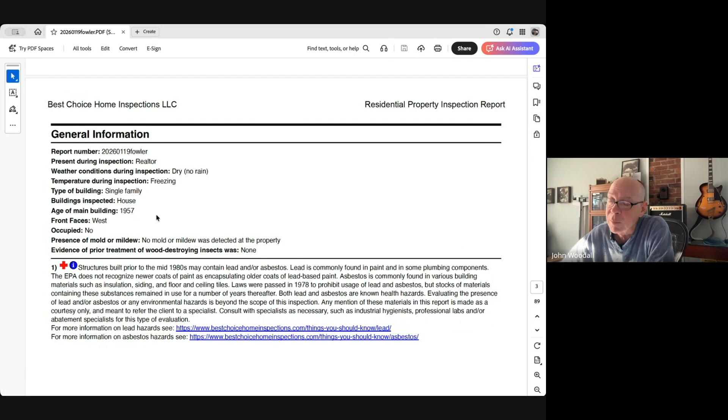When I say modern, I'm thinking 1990s and beyond, where we don't have to worry about knob and tube, and we also don't have to worry about toxins like asbestos or lead. They're typically not going to be present after 1978, with lead and asbestos being concerns before that.

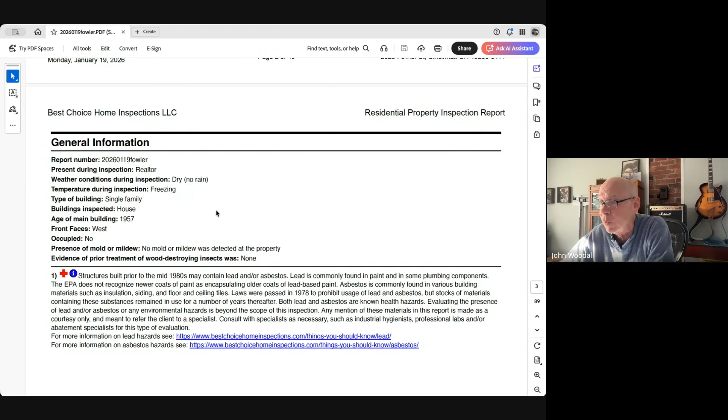Weather conditions are important. Let's say you're doing a stone foundation and there's a little water in the basement - you're not going to be overly concerned, that would be kind of normal. But if it's been July and dry for three weeks and there's water in the basement, then we've got to talk about that and note it. So that's kind of just general information.

As we go down, most home inspectors, I always start outside. You want to do that because you want to look at the way the house sits on the land. Is it in a bowl where all the water is running down toward the house? Ideally not. You want to note the way water moves around that house. It's really important - water is the enemy.

So here you'll see the site profile, and sometimes if there's sidewalk or driveway conditions - like I'm sure you've all seen driveways that go down into the house - these are things we want to look at and note: how is that water being managed once it gets down to the bottom of the driveway?

Things like that, and as we go on, exterior foundation. So as you're walking around the house, you're noting the exterior - what is it? Is it vinyl siding, aluminum, stone, brick, things like this. And they all have their own unique concerns that we would address in this segment.

Also, what's the house? How is the house built? Wood frame is a lot of houses, but some are masonry, and things like this are notable more for structural concerns, which we'll get into a little bit later. Stone foundations, masonry foundations are very unforgiving of movement. So that's good and bad.

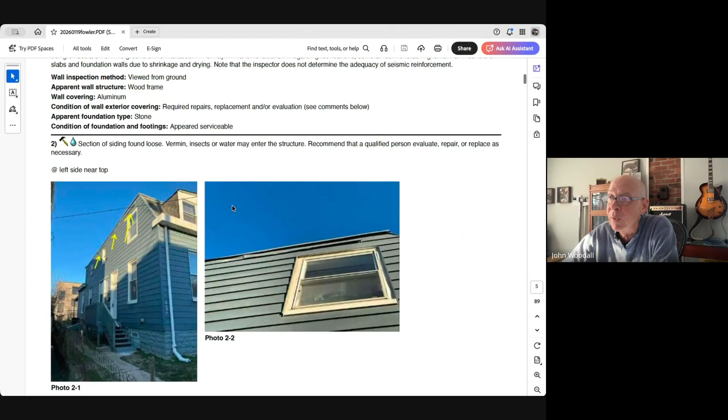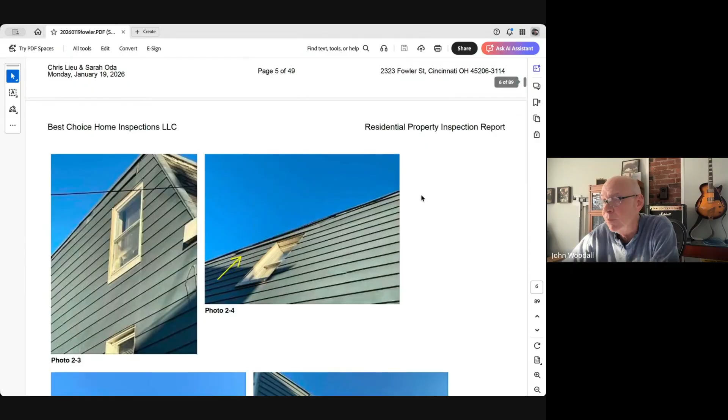You'll see on this one we had some loose siding, and we're pointing out the three aspects of why that's important and what we recommend to deal with it, as we will all concerns. This house, as I'm recalling, had a lot of siding issues, and you can see those there.

Paint and stain is relevant because if your paint, especially on a wood surface, starts to disintegrate, then the next thing to go is the wood and the structure itself. So we kind of move through that.

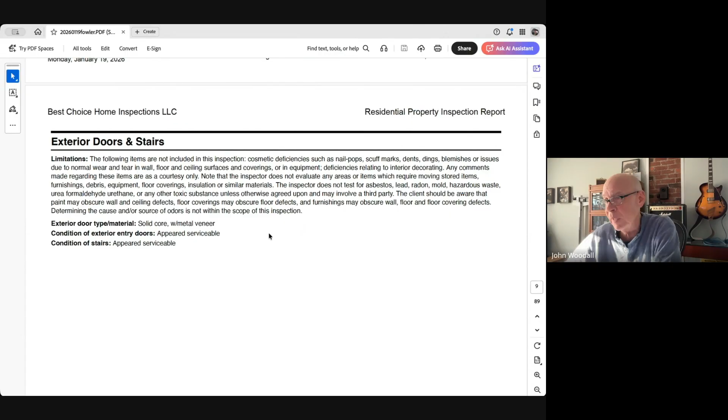When we get to the exterior doors and stairs, I guess it's self-evident, but we want to note - if it's a solid core wood door, let's note the stain and paint finish, because that's going to be subject to fungal rot and things like that. Most modern houses have the solid core metal veneer doors that I'm sure you've all seen, and then we just note their condition.

Moving on, decks, porches, patios - very concerning for decks if they're not built right. You'd be surprised how many people will throw up a deck on a weekend with their buddies, and well, they're often not framed right, or foundations aren't right, the piers aren't right. And obviously you've probably seen those decks too - they sink after about three years, and you've got those problems to deal with.

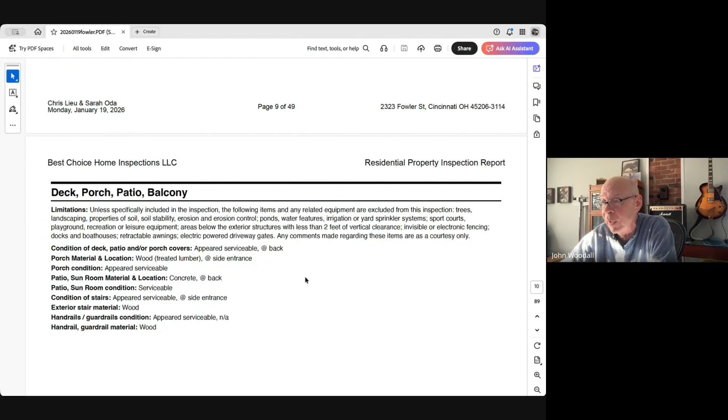We'll note maintenance issues. Any of you who've owned a deck, every 3 or 4 years you've got to maintain the wood decks, treat them, seal them, etc. In the reports, I'll note what the deck's made of, and I love the Trex or the PVC decking - that is a great product. I have it myself, relatively maintenance free.

And if a deck is in a real bad way, I encourage my clients to go in that direction if they can. But noting the structure, handrails, things like this - these can fall into the hazard category, and that's obviously something we want to note.

And my understanding is, and again I'll defer to the agent, but if it is a hazard - let me ask you, if it is a hazard, is it usually incumbent upon the seller, or is that just sort of a gray area?

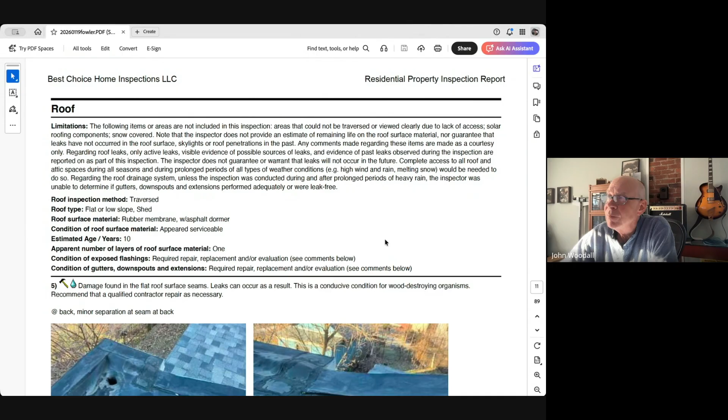I think it depends on the totality of the contract. If you're paying asking price or very close to it, then yes, it's all negotiable. That's why I defer to the agent.

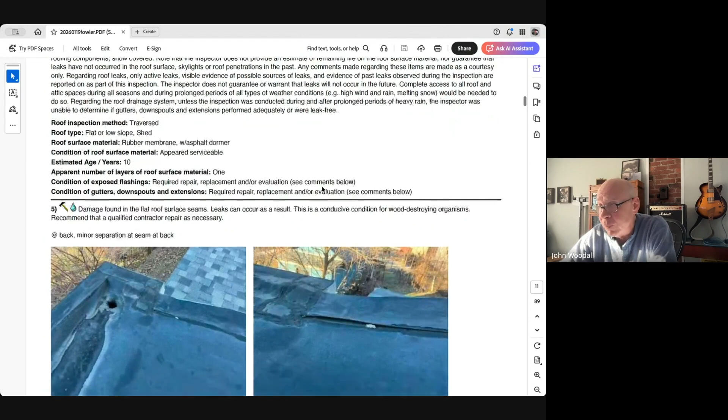Roofs are very important, not just because of the potential for water damage which can lead to mold, mildew, fungal rot, but they're very expensive. You want your home inspector to take a really good look, either climbing up there, flying a drone, or a mixture of both. I climb out windows, I climb on roofs. I do have a drone, but it's not my first choice. I prefer to walk that deck - there are things you can feel under your feet that you can't get with a drone.

This property we're using as an example looks like it had a rubber roof. We see in this image 5.2 that the seams were starting to go. I don't recall, but when we get further down there'll be interior shots - if we had interior moisture, that'll be noted there. Right now we're still focused on the exterior and the roof.

There were a couple notes here, but we want to note specifically the condition of it. An experienced home inspector has seen enough roofs to know about how old it is, and they should be able to offer that estimate for you. It's important because the average lifespan of an asphalt roof, which is typical, is about 25 to 30 years. If the home inspector says this roof is about 40 years old, that's the next major expense you're going to have at that property.

You need to know that an average roof these days is $15,000 to $20,000, and that's for a 2,000 square foot home. You start getting into larger, more custom homes, then they can get very expensive. And again, that's asphalt - we're not talking about slate, tile, metal roofs, things like that.

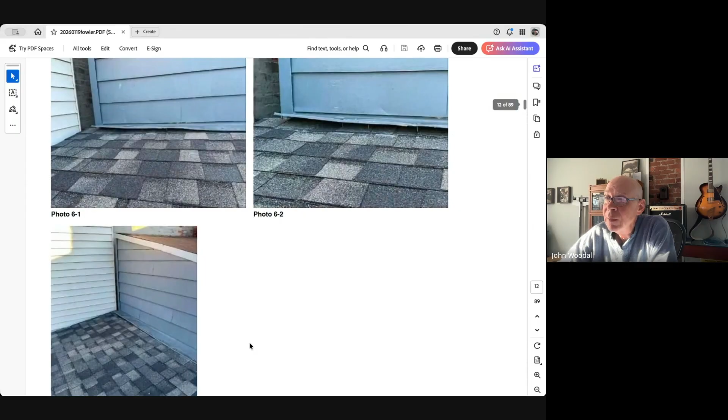Let's go on down here. This house was a hybrid - it had a couple of different roofs on it. Let's see what the issue was with this one... oh my God, this is... we had downspout issues with this one as well.

This goes back to walking around the exterior, and again, water being the enemy of all structures. We want to note how that water is moving around the property and if it's moving around effectively, because that all has to be managed and maintained.

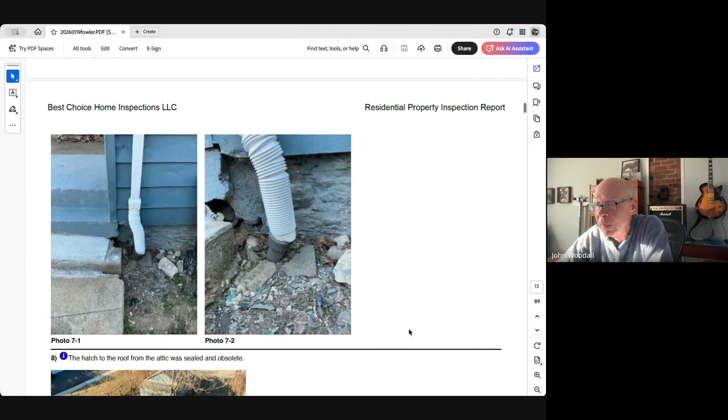This was interesting - I got up on this roof and they had a hatch up there that they'd set this old chimney pot on. These chimney pots are beautiful, you see them on old homes, but if they're not being used appropriately, then maybe we do away with them and move to a more modern chimney.

Did they just put it up there to hold the hatch down? Yeah, in this case that's what they did. I think they had it up there and were looking for a weight so the hatch wouldn't blow away. Whoa, but it could roll up, right?

Yeah. Now here's another spot on the same roof - we had other chimney crowns that were intact, but we see this crown and we know that ice and water can get in here, get down this masonry chimney. Masonry chimneys do not tolerate water very well. We've learned a lot over the last 100 years about how carbon dioxide can mix with water and create carbonic acid, and just eats these things from the inside out.

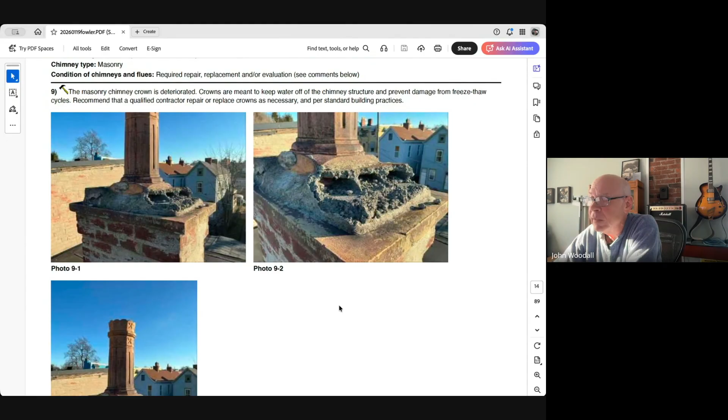So rain caps have become the modern standard, and I always encourage them when I don't see them. Now any architect would probably say it's a crime to put a rain cap on this beautiful 100-year-old chimney pot, but that's a different conversation. Let's move on.

These fireplaces were taken out of service. The home inspector wants to note that, because obviously it's an egress for creatures, and it's also a thermal barrier - if they're open, you can lose a lot of energy out your fireplace. So if they are taken out of service, it's nice to see that they're sealed.

Going back to the chimneys, if they're not in service, I recommend we seal those as well. Typically, like this home, the chimney was being used partially by a water heater and a furnace, and then some of the chimneys with the old fireplaces were shut down. But that's all something that should be noted by your home inspector, just part of a general home inspection.

Basements obviously are critical for many reasons. Structural issues, we'll find those problems here. Water penetration, see that here. Often if there's mold and mildew, it will be found here. And usually termites are found here as well, or at least the origin point of the termite. So that's all very critical.

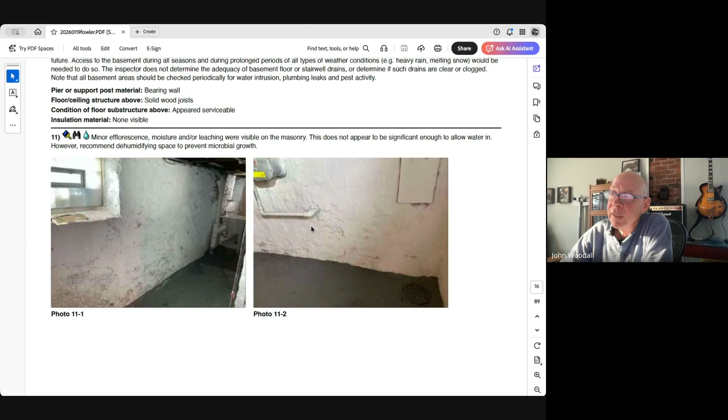This house looks like efflorescence, sort of like where this was an old stone foundation and a little bit of water. Masonry is like a sponge. You can put water on one side, it'll soak through to the other side, and that's what we're seeing here. This condition can usually be taken care of with a dehumidifier and some good paint sealant. This basement wasn't too bad, as I recall.

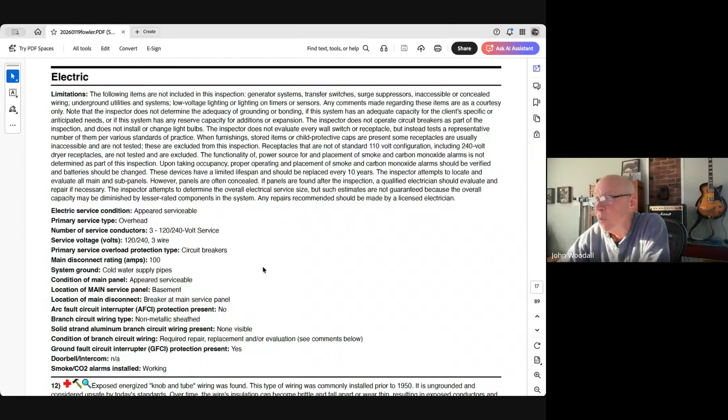I don't want to skip over electrical here. It looks like there weren't a lot of electrical problems. Electrically, though, the home inspector should be noting the type of service, were the wires underground or overground, what's the main amperage for the home? That's relevant because what if the buyer wants to add a hot tub or another addition. If they're going to need more juice, they need to know what's there now and what they can look at. They're probably going to need a new electric panel and things like this.

Now, it looks like we did have some exposed knob and tube in this property, and that's noted here in item 12. And then there we see the knob and tube in the images. That's an electric tester here where my mouse is, indicating that it's hot, so it was in service. Insurance companies don't like knob and tube.

Can you say what knob and tube is?

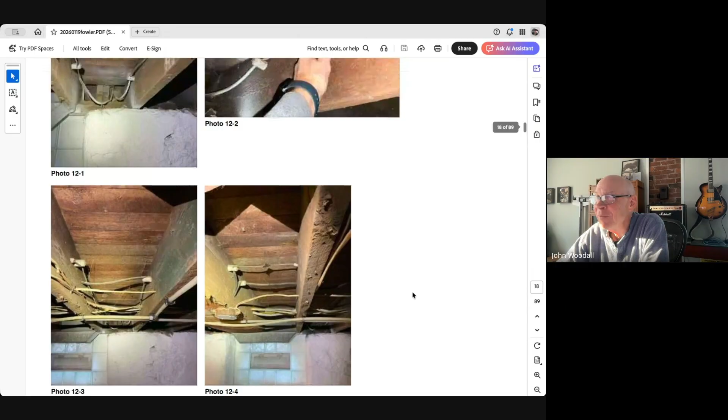That can affect the loan because let's say if it's a HUD or an FHA loan or a VA loan, they really, really care about that. So that usually has to be taken care of ASAP. I could go on and on about knob and tube, but we'll leave it at that for now.

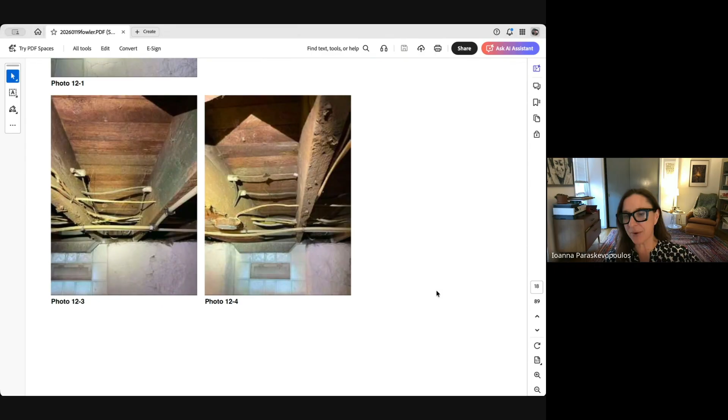Could you just briefly say why knob and tube is not something you want in your house? Yeah, well, it's ungrounded. So you can have an old house that has some knob and tube, but where the wet areas are, the kitchens and the baths, we've got to have grounds. You want to see those GFCI plugs, the little push button plugs that I'm sure you've all seen. We want to see those there in the wet areas. The rule of thumb is generally arm's reach, so if you can touch the plug in the water at the same time, it ought to be a GFCI.

You could also do arc fault circuit interrupters, which are on the electric panel itself, but that's more the future. Codes are moving that way, but let's stick to just having protection on grounded plugs and circuitry near a wet area. That also applies to the exterior. If we have a plug outside, we want to make sure it's grounded, has GFCI protection, and a weather guard too. We don't want it to get wet. But that's why it's so important.

Going back to insurance companies for a minute, they're okay with it being out of sight, out of mind. In other words, if it's in the wall running up to your dining room to a two-prong plug where you're only going to plug in a fan or a light, it really is not a significant problem. But we don't want it here, as seen in these images, where you could poke it with a stick. You could see it, you could touch it. So we really want this area to be boxed up and replaced with Romex, even if it's ungrounded, and then take that up the wall.

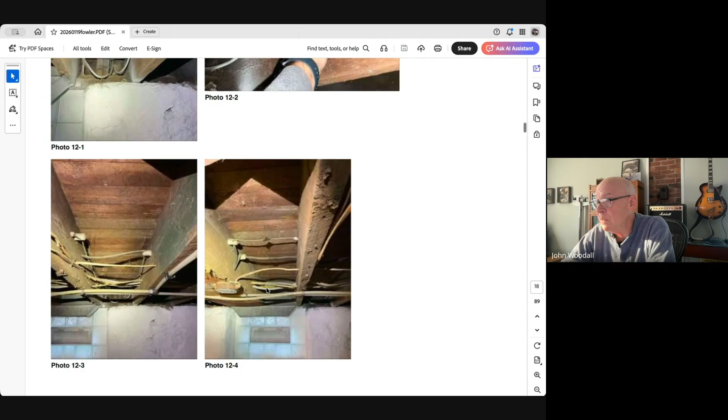What I'm getting at is, on an old home, there's no obligation to bring it up to modern codes, but there is an obligation to make it safe. So that's the distinction.

Any other questions about knob and tube or electric in general? We might touch on some more here as we go.

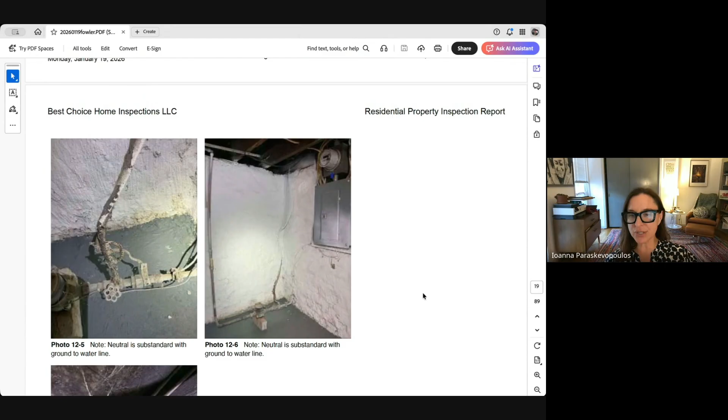Maybe this isn't a fair question to ask you, but do you know about, on average, how much it can cost to replace knob and tube? Well, it's a variable. Obviously, it depends on how extensive it is. But I've had a few homes done myself.

I flipped a lot of homes prior to starting this business. Let's look at these images. Let's just say it's isolated to these areas.

What the electrician would do, and I would recommend a licensed electrician doing this, is likely replace what knob and tube we can see here with new Romex, new wire. Then they would take that over to the edge of the foundation or the wall and put a junction box there and tie the new wire to the old wire. Now, yes, it's ungrounded going up that wall, and that will hopefully lead to ungrounded plugs that we don't care about. Again, the dining room, the living room, two-prong plugs.

We want to replace that wire with grounded plugs that need to be grounded at the kitchens, baths, and wet areas. But back to your question, if you're not replacing a whole bunch of Romex and doing a whole bunch of junction boxes, you could probably solve this problem for $1,500. But if the whole basement has to be pulled, obviously the costs escalate.

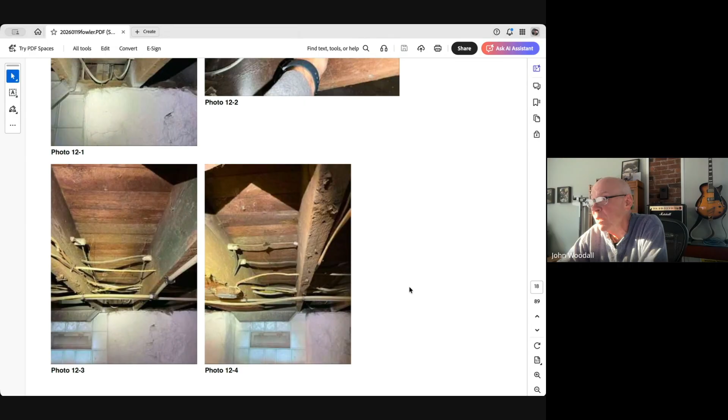But if there were a drywall ceiling here or a sealed ceiling, then it would be less important. Again, it would be like the wall where you can't see it or poke it with a stick. So out of sight, out of mind, as long as we have the grounds where we need them.

Let's see, it looks like, what was the deal here? Oh, I think the ground wire came loose on this substandard ground wire to the water line.

So what happened here was the ground wire, they had run a ground wire separately. Sometimes not licensed electricians will do this where it's a cheat kind of thing, where they'll run a ground wire to connect to the plumbing and then run that wire to a plug by the bathroom so they can get a grounded plug there, rather than running brand new grounded wire or Romex.

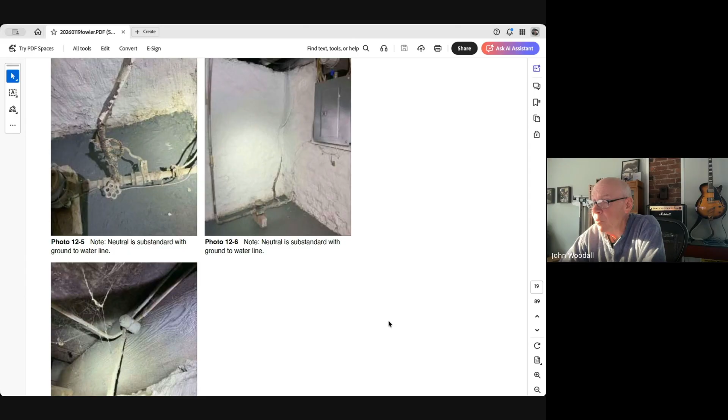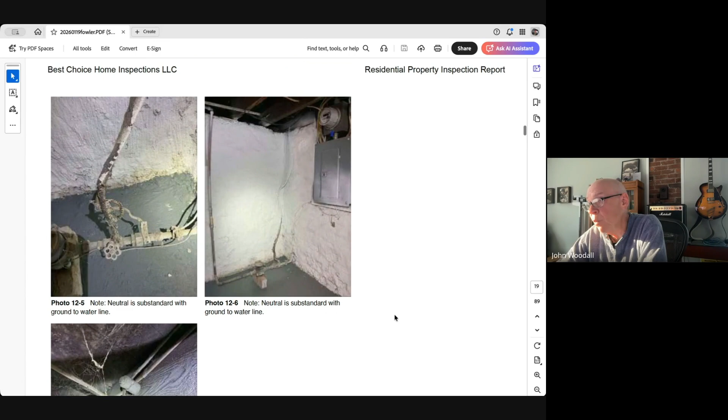Now, that's a separate issue from having your electric panel grounded to the plumbing. That should always be the case, regardless of how old the house is. That panel should have been upgraded and grounded to the plumbing. In modern homes, you want a ground rod outside as well. You want two grounds. In older homes, you'll often see one and not the other, but I always recommend that you have two grounds. Did I divert there, or did that answer your question?

Yes, it did. Yeah. Okay. Good.

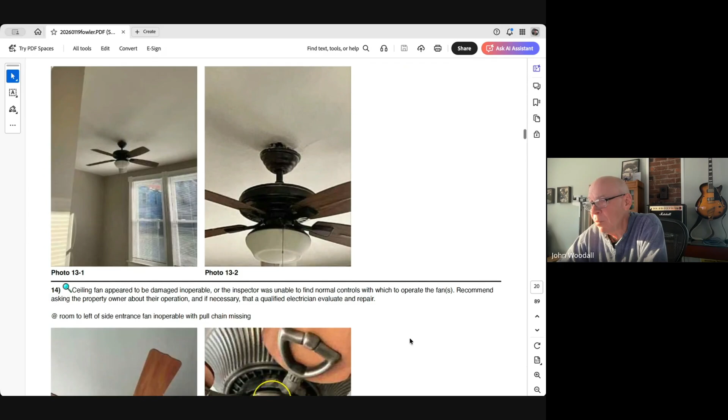So yeah, then I go on. It looks like I'm talking about the light fans, and this is important because what if that fan falls? We're not necessarily running new wire, but we're stabilizing that fan and making it safe. So that would classify as a hazard if it's not properly secured.

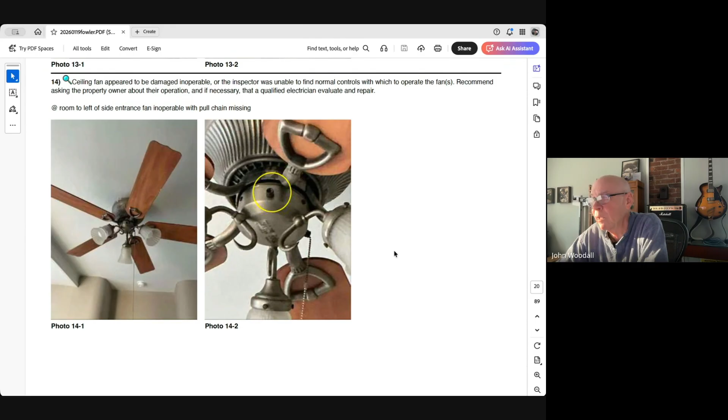And then we're going to point out the defect with the fan. In other words, the pull chain was gone. You can't turn the thing off and on. Simple but important.

We're in plumbing now. Here we want to note where everything is, because you'd be surprised how many homeowners don't know where their water main is. And if a line breaks up in your upstairs bathroom, you've got to turn that off quick, so you don't want to be searching for your main. So the home inspector should always point that out. If the client's there, point it out with them, and always put it in the report.

And again, in doing a home inspection, I like to have my clients present because there is so much to be learned from the experience, just walking around with a home inspector and seeing where things are and what to do about this and what to do about that. I think it's critical information.

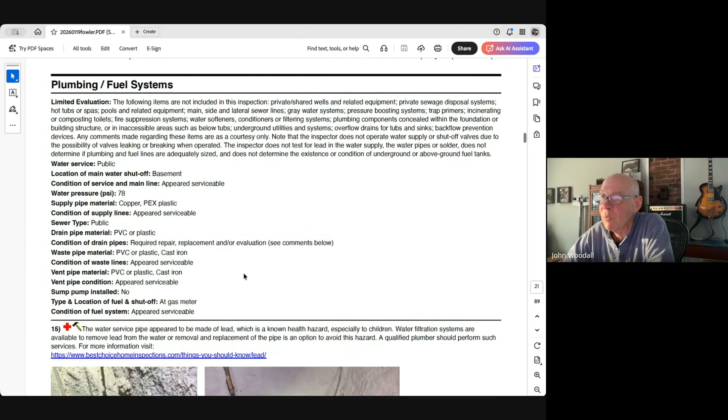Now, I'm always amazed to hear from either clients or real estate agents that there are home inspectors out there that don't like anyone around. They like to work alone, and I don't subscribe to that. Yeah, I'll leave it at that. But there's a lot of value in being there. And I encourage, no matter who you hire to do your home inspection, I encourage you to be there.

So as you can see here, I made a note that it's public water, we're not dealing with a well — that's a whole nother thing. And then we've got our main shutoff in the basement. Don't cover it with boxes. Everything appeared serviceable. I note the type of plumbing.

Here we had copper and PEX, so we had a hybrid system. PEX, for those who don't know, is that more modern product — it's basically like a PVC type product, a polyethylene something, but it's nice, it's modern. The nice thing about PEX is if you freeze copper, it can rupture, and PEX won't do that. It has a little bit of elasticity to it. It's also great in earthquakes, but that's not too much of a concern here. But it can handle freezing, and we like that.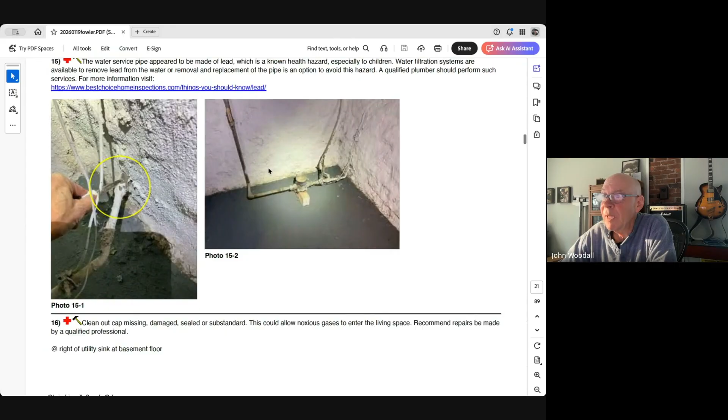General conditions, yeah. So we made those notes. Now here we had lead. So this was an older home, and that's something you want to note.

Now, in the city of Cincinnati, or I believe the state of Ohio, and maybe across the nation, the water companies are going around and replacing the lead at their expense. And I hope it stays that way. But I encourage my clients to make that call first, find out if you're on the schedule. If not, get on the schedule.

But know that you currently have lead pipe coming in from the street. And you can see where it comes in at the basement foundation here, and then it taps into the water meter here, and then we're copper from there on until it meets the PEX. So this is the concern, the lead underground and at the meter and then to the street. And that's what the water company will be replacing systematically.

Hopefully we'll stop seeing this in the next few years. But I encourage my clients just to know it's there, but also there are some really good high-tech water filters available that can filter out heavy metals and just about anything these days. So that's the short-term fix until you can get this lead replaced.

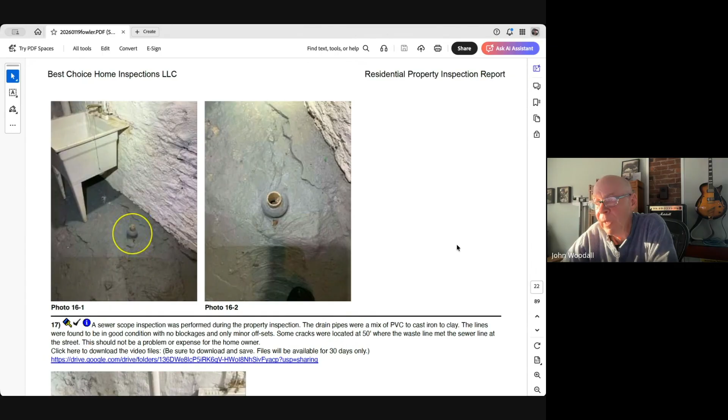Then other issues we're looking for, we don't want to see open pipes in your basement floor. It could be, especially in older homes where they would mix groundwater with sewage water. But that means that creatures that get into sewer, we're talking about rats here, they come up and they will, if they have an egress, they'll find it.

Everyone who lives in Clifton knows that if you don't have a drain cap, you will have rats in your basement. And toilets too, right? Well, yeah, they swim, don't they? They do come up those toilets in the basement. That's aggressive. Yeah. So I always note that.

I think most home inspectors do. We did a sewer scope at this inspection, and when we get through this, I want to show you a little segment on that. We'll do a little video thing, and you can kind of see what we saw here. There were some issues that were found.

These can be very expensive problems. Basically, you're busting up the concrete, digging up the pipe. Sometimes that can extend under the foundation. Sometimes that can extend all the way to the street, and that can get expensive.

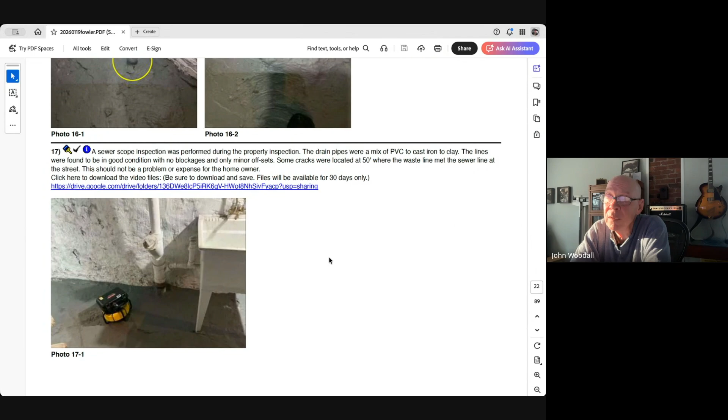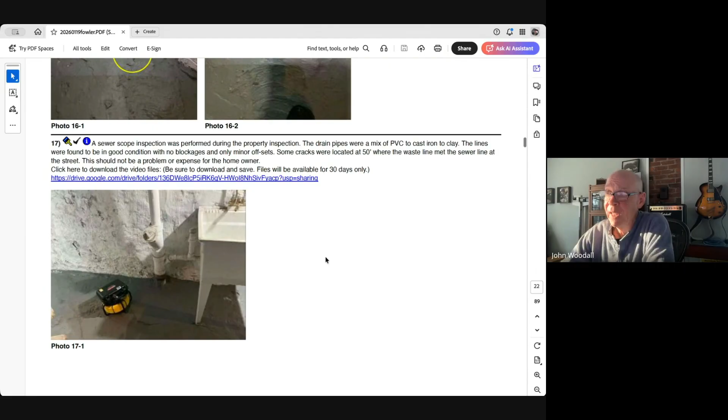I paid for one about 15 years ago, and it was $9,000 back then. So that was for about a 15-foot one. Wow, so you can only imagine what it is now. I haven't paid for one in a long time, but they get into the thousands very quickly. So you need to know about this before you buy the house.

Let me just say this about that. A sewer scope is probably always a good idea, but I think if your home is older than, say, 1980, I would almost insist on it, because you're getting into the older pipe, cast iron, clay, and that's where the real problems can arise. Now, I have seen in new construction where a concrete truck backed over brand new PVC pipe.

We ran a sewer scope and we saw a collapse, but that's an isolated incident. But if you have any suspicion that there's a problem with the drain line, I always run the line. Like, see that utility sink there? I would run that for 5-7 minutes, full blast, and just listen for gurgling, make sure we got good flow. Any home inspector should be doing that regardless of the sewer scope. And you kind of get a hint of the condition of the pipes.

But anything prior to 1980, I would get a sewer scope. These are really expensive problems that you want to get in front of or know about before you buy the home.

Now, all the mechanics, water heater, the furnace, which we're going to get to, we want to know, how old is it? Who's the manufacturer? Some manufacturers are better than others. Is it gas? Is it electric? Things like that. So you got a 40-gallon gas tank here, that could accommodate a family of 4 probably with no problems. But 6 people, you might want to bump that up a little.

Also, water heaters are expensive, so we want to know we have no issues with it, or how old is it? Are we going to be replacing that in the next few years? Do you check and see if it's a gas water heater? Do you check and make sure it's not leaking carbon monoxide?

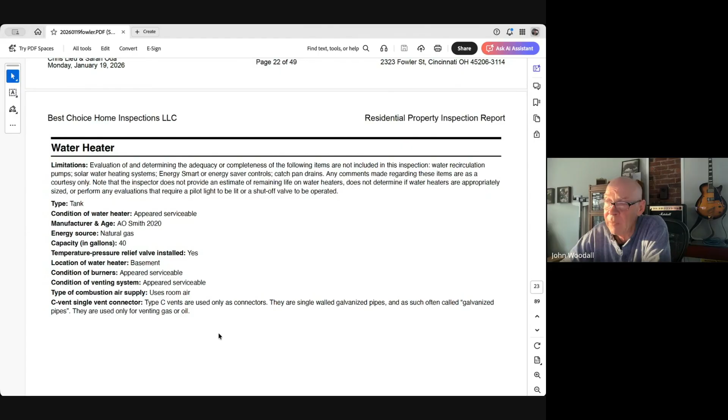Yeah, that's a good point. Thank you, Randy. I carry what I call a sniffer, basically a CO and gas detector. When I'm running these things, first you always trust your nose, that'll give you a clue. But I'll sniff the areas where carbon monoxide's escaping or running up the flue on the furnace and water heater, and make sure there's no leaks. I'll often check connections around the oven or gas appliances too, where that little hose goes into the back of the oven. Sometimes you've walked into a kitchen and gotten a hint of gas, and that's usually where it's coming from.

Same thing with the HVAC system, both the air conditioner and furnace. This is a Trane, love Trane, top of the line, 2020. I'd tell this client, we'll check it out, but you're not going to have any problems for 20 years. These are great systems, just keep them properly maintained. It looks like the furnace was a 2020 Trane, and the air conditioner was 2019, so they were probably put in at the same time in 2020. They're really good systems, so I think this client's not going to have anything to worry about.

Oh, what did I say here? It was actually not working. Sorry, I got ahead of myself, didn't I? Something was going on, but they fixed it, and it's been working great since. What we know about the Trane is it's a good system, relatively new at 2020. But I did notice we want to see a nice blue, clean flame, meaning it's not fluttering, it's smooth, and we're not hearing a lot of pops. So apparently we didn't have that here.

Or roll out, why is that important? Well, it's kind of like a carburetor on an old car, the flow of oxygen and gas needs to be adjusted evenly. If it's not, there's efficiency issues and maybe carbon monoxide issues. So this one probably had that problem, probably needed a little tuning.

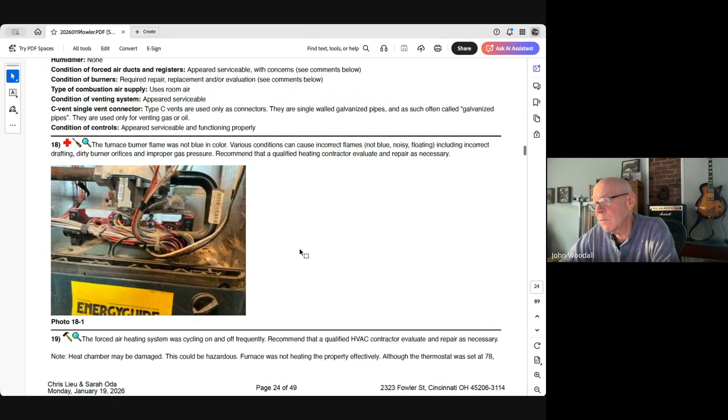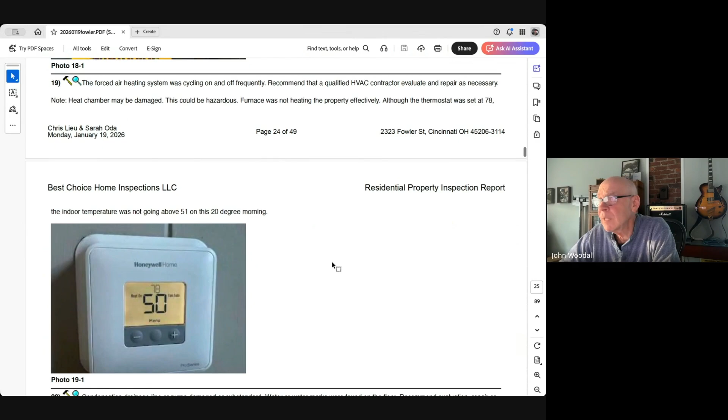We did have some issues here, it wasn't going over 50. I think that's what they did, was clean it. Yeah, and from what I remember, it worked great afterward. So I think exactly what you're saying is what they did, which goes back to the maintenance. You really have to stay on top of these things.

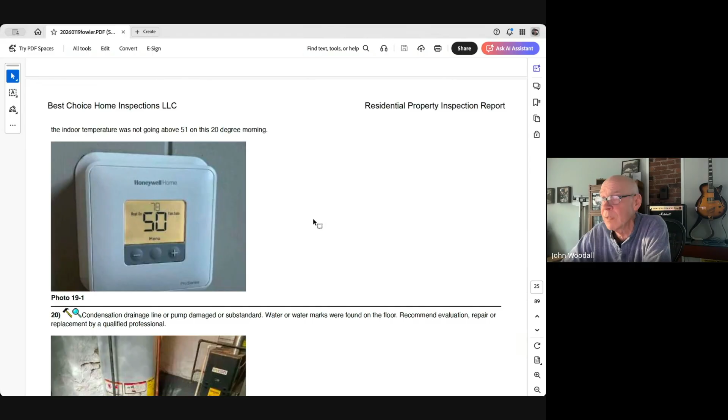I have an income property, and the tenant didn't replace the filter, and I got a call that the furnace wasn't working. We quickly figured out it was because the filter was clogged. You can break these things by not maintaining them, and they're very expensive. So let's get them serviced and do routine maintenance, changing the filter, and if you have a humidifier, change those humidifier pads.

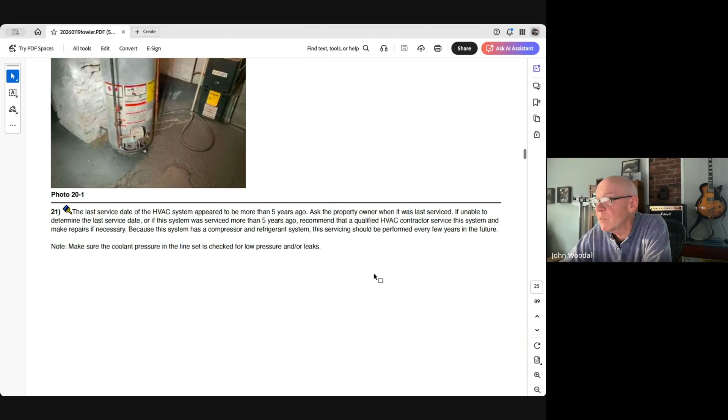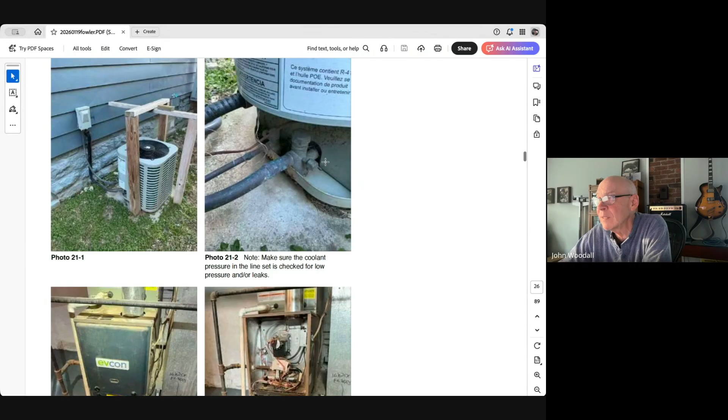Here's where I note that in the report: the last service date of the HVAC system appeared to be more than 5 years ago, so I recommend that. And here's a note to make sure the coolant pressure is checked in the line set. This is the line set here, and that's where the technician will put the pressure gauge on to make sure everything is running correctly.

Here's the HVAC system. Oh, this was a multifamily, wasn't it? Yeah, I'm remembering that now. So we had a couple different systems here. This is not the Trane. This is an older model.

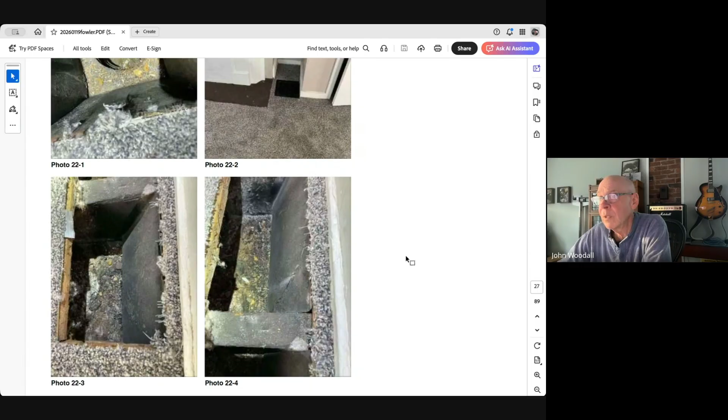And then I always look in some of the ducts, especially with rental properties. A lot of times you find really nasty things in there. And if you've got turnover, obviously, if you're buying the property, there's turnover.

You don't want to be breathing all this old stuff that's nasty in the ductwork. If I see mold or mildew, I'll point that out. That's a whole other topic, but we're going to want to have them fumigated and kill that bacteria so you're not breathing it. Usually, for most homes without mold, you can just vacuum these things out with a shop vac, and that'll be adequate.

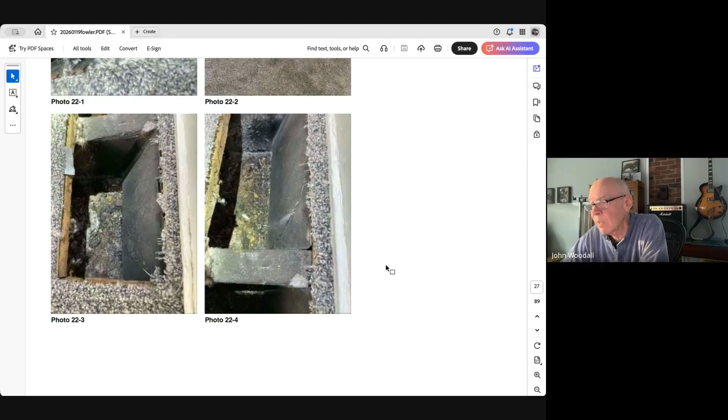There are companies that do professional cleanings where they go down the whole thing, and that's great if you want to do that. Probably a good idea for rental properties where you have a lot of turnover, or pets, a lot of dog hair and things like that in there. If you have allergies, that's a consideration. So things like that.

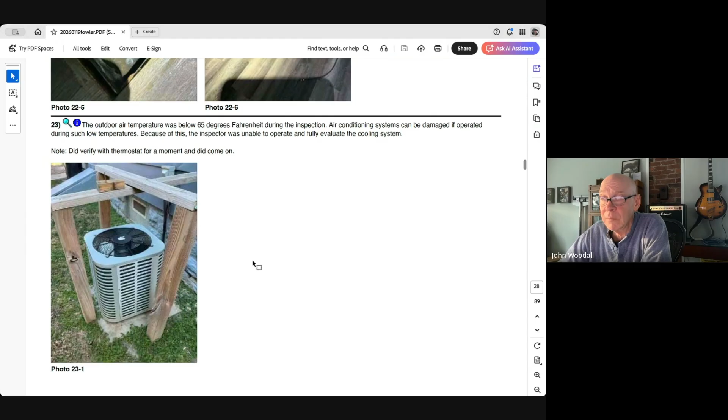This was a cold day. It was January, so you can't run the air conditioners when it's really cold. You can break them. Sometimes I'll turn them on for just a few seconds to make sure they kick on and that the thermostat, those systems, are operating. I can't fully check the system since you don't want to run them when it's cold. They can't be really checked, so I'll say, let's do that later.

Do we get to the laundry section? If there is a laundry, looks like we had one in the basement. Looks like we had no issues, but things to check there might be the gas line to the dryer, if there is one.

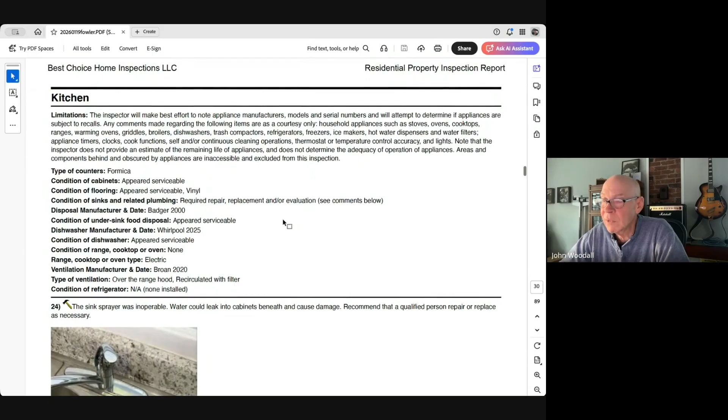I always check serial numbers on all the appliances with kitchen, laundry, and also the water heater and the furnace too. With that, I'm verifying the age, but I'm also checking for recalls. I want my client to know what they're buying. If there's been a recall, I want them to know what they've got ahead of them. Now, sure, the recall will pay for it, but it's a hassle. Believe me, I've done it. And there's usually a charge for this or that, but anyway, it's good information.

So now we move upstairs from the basement and everything down there. That's where the home inspector will spend most of their time, by the way, in the basement.

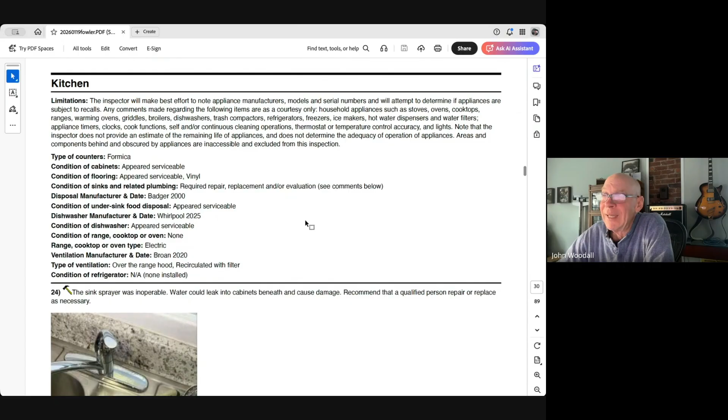The kitchen. So here again, I'll check serial numbers on everything. I'll note the manufacturer and the date of the appliances. Looks like here the sprayer wasn't working good. I think it was this flange. What can happen is water pools here and it goes down here where my mouse is at the flange for the sprayer, and it ends up underneath your sink and your cabinet. And now you've got potentially mold, mildew, fungal rot, things like that. Water is the enemy.

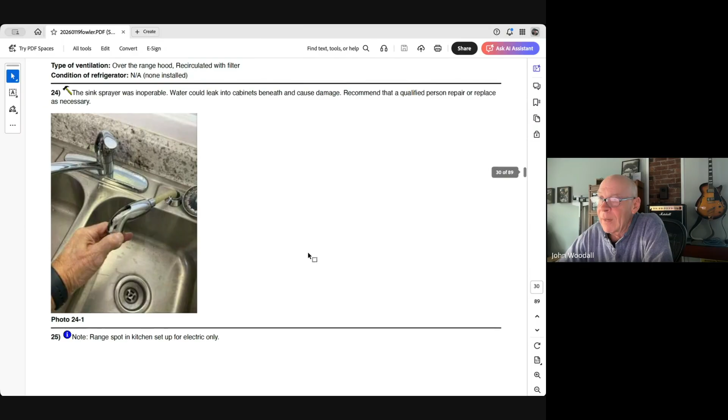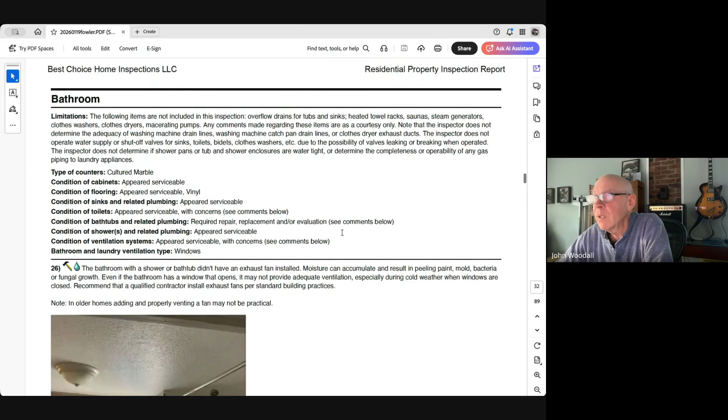Moving on. Okay, the bathrooms, each one individually. We'll note what are the products used. This one, cultured marble, is the manufactured countertops that you see off the shelf in Lowe's. They're not made out of marble. I don't know why they call them that. But if it were granite, I would note that, or tile, or there's so many products out there, Formica. So we note that in the report.

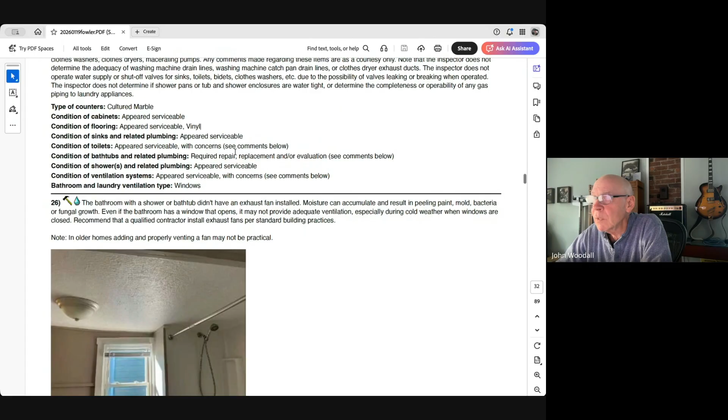If there's an issue, like here, it'll say, condition of the toilet, see comments below, and then we'll go on down and we'll look at that.

I always note, now in older homes, there's often not ventilation fans in bathrooms that create a lot of moisture, meaning a shower or a tub. Back in the old days, 100 years ago, a lot of people didn't take showers. Everybody kind of bathed, and that's just how they did it back then. Also, they would crack a window. So what you find in old homes is no ventilation fans.

Now, I always recommend them, but I put a note in here. Again, what I was saying earlier, there's no obligation to bring it up to modern codes, but I think the home inspector has an obligation to mention these things. Let's say the buyer wants to remodel the bathroom. Well, hey, that would be a great time to put in a ventilation fan at minimal cost. So you'll see that in there.

And here we've got the toilet issue. It looks like, let's see, what was the deal with that? Oh, simple, the seat was loose, no big deal. If you're buying a home, you better own a screwdriver. If not, go get one.

Now, substandard caulking, I always look at that very carefully, and most home inspectors should.

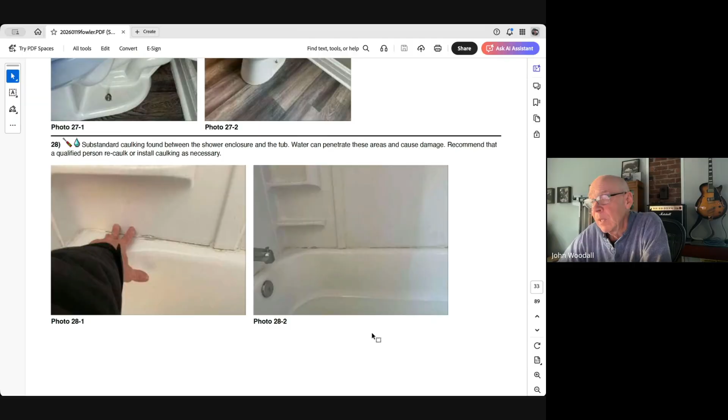If water gets behind there, we've got all those problems that we've talked about. So caulk is one of those things. It has to be maintained and noted.

Obvious things like, a home inspector should be running that bathtub and that sink because you're going to know, right? So we had a clog here or a slow drain. Again, easy problem to solve, but very important, and you really need to know that if you're buying the home.

Here we get into the interior ceilings, walls, and floors. This is where we would find maybe those water issues that were coming from the roof, the attic, or somewhere else. The windows, the siding. Let's see, looks like

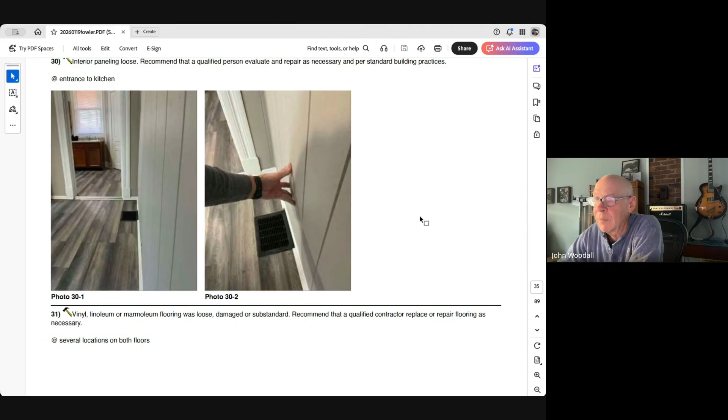we didn't have a whole lot of wet issues. Loose paneling - again, this was an old house, and with plaster and lath, it can get loose over the years. A lot of folks, rather than tear it all out and re-drywall, they'll put paneling over it, and then you get loose paneling and things like that. So again, it's not enough to read it on the report - it's here, it's noted, and you can see what's going on. But if you were there at the inspection, the inspector would be talking to you about what's under that paneling. And an experienced inspector should know without looking at it.

Made notes on the floor. We had some issues. A lot of this is cosmetic concerns, but still a notable defect, and an expense. The buyer has to make these calls - do I want to repair that or replace it? Those are conversations that you have, but that might be more a conversation that ends up being between the buyer, the realtor, and the seller, as part of the negotiation process. But it looks like we had quite a few here.

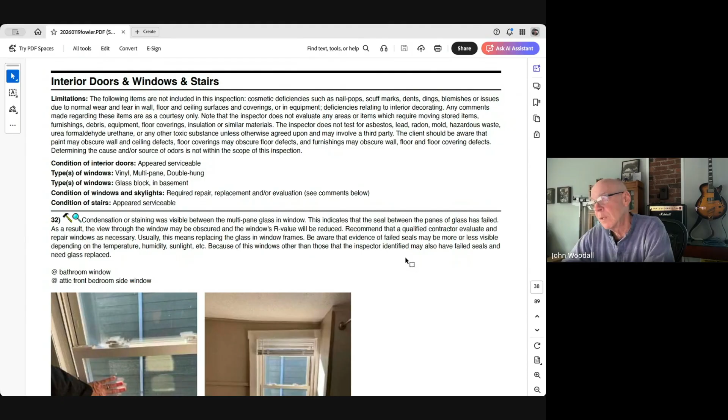Again, older homes often don't have level floors. It's not that it's structurally unsound, just that things move over the years. I tell my clients that unless there's an obvious issue with ongoing movement, typically a home that's been around more than 30 years has settled, and you're not going to see a lot more movement. So if the problems can be addressed at that point - every situation's unique, but I'm kind of making general statements here.

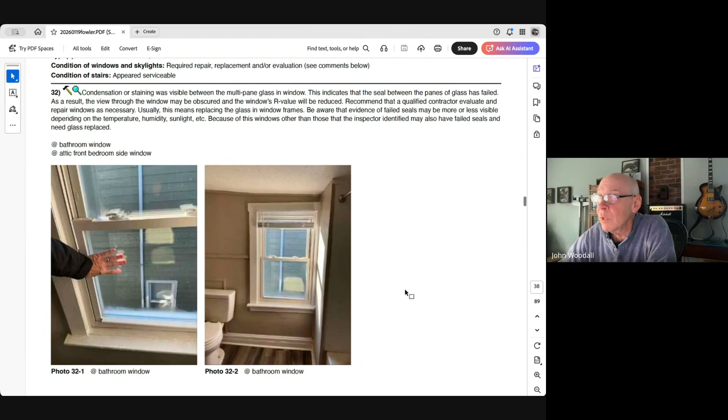We talk about doors and windows. Windows are obviously very important - they're very expensive to replace. You've probably all seen windows that fog up where the seals get broken between the layered panes of glass. And it looks like we had a couple here.

The energy loss on these is not significant - it's more the aesthetic, especially if it were like at your kitchen window, you're at the sink looking out that window every day. You don't want to see a fogged window, but they're always noted in the report. There are companies that can come out and replace this glass for a couple hundred dollars, or replace the whole window, maybe 500. When I throw these numbers around, this is for a like-kind vinyl replacement window, not a thousand-dollar Pella. So we're always talking like-kind.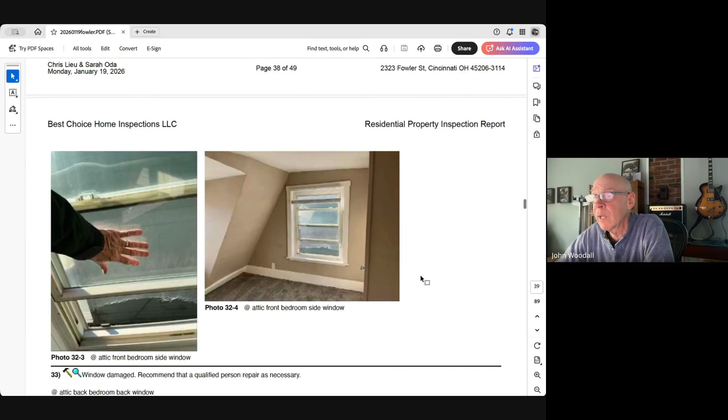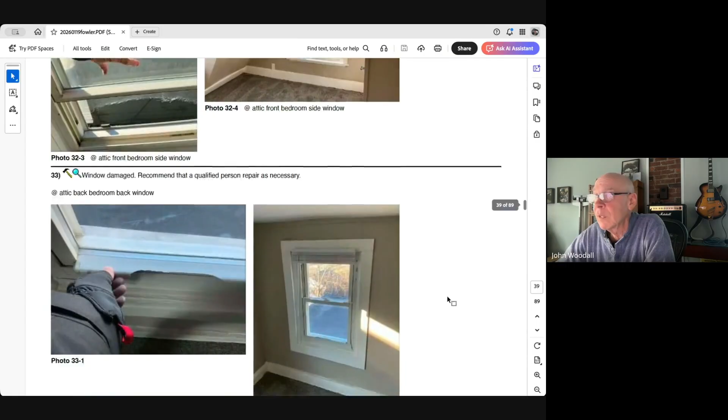This goes back to the conversations that we'd be having on site if we were together doing a home inspection. So we had a few of those problems, all noted. I'm very specific - at the attic, front bedroom, side window - I want the buyer to know exactly what window and where it was. Often my reports can be used after the deal is done - they'll throw the report to the contractor and say make it right, and use the report as a punch list. That works very well because they've got the description of what's wrong and where it is. So they're a good utilitarian tool as well.

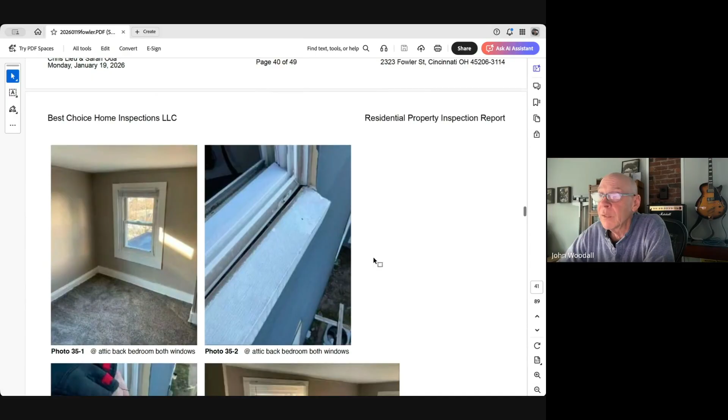More notes on windows. What was the specific problem? Well, that window wouldn't stay open - that one had a bad spring. Now, this is really significant as we look out here. When I say coil work, I'm talking about the aluminum that, when they put in a new window on an old house, they bend coil on site and caulk it in and make it tight, make those windows watertight.

But here we can see this window was probably done a long time ago, and the coils come apart. Now water is getting in behind the window and behind the siding. So you can see that's a pretty big gap here where my mouse is, and that needs to be addressed. Here I put my fingers down there so you could kind of see in the picture. But very significant - we cannot let water get in the wall.

And I didn't see any brown spots on the walls. I went around and tested them. So maybe we're lucky, or maybe they just didn't manifest. But that's a big little problem, and it needs to be addressed. Do you guys remember how that turned out?

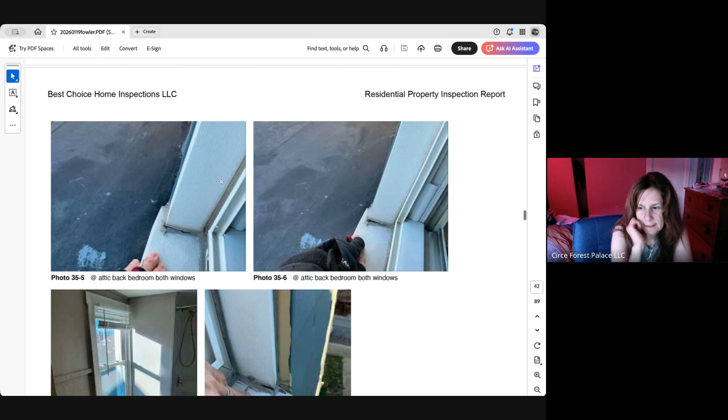We haven't even started the repairs yet. Yeah, okay, I was curious, I thought I'd ask. Yeah, the coil guy needs to get up there and tighten this up.

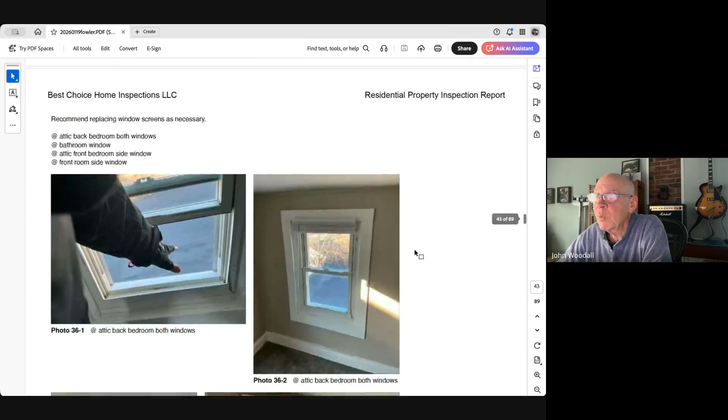More windows. Older homes are going to have a lot of window issues, so make sure those don't bite you during your home inspection. Make sure you see the inspector go around and check every single window: raise it, lower it, does it close properly, does it lock properly, and is it broken?

Looks like we had bad screens here too. I point those out - they're not superficial. A screen's a real deal, and they can cost $50 each if you have to have one manufactured for that specific window.

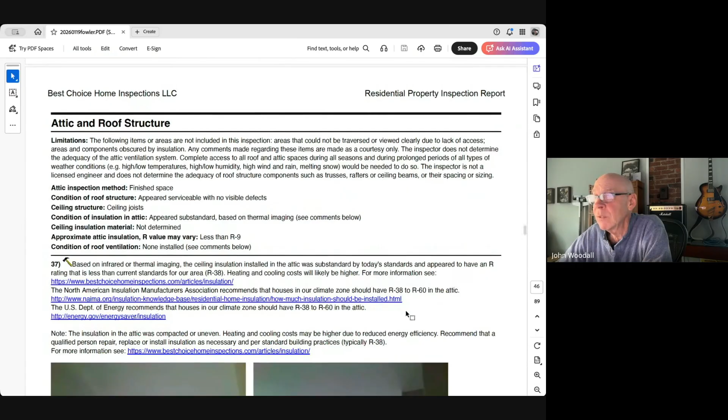In the attic, I'm looking for water penetration, brown spots on the ceiling. In this case, the attic was finished, so you could spot things like that.

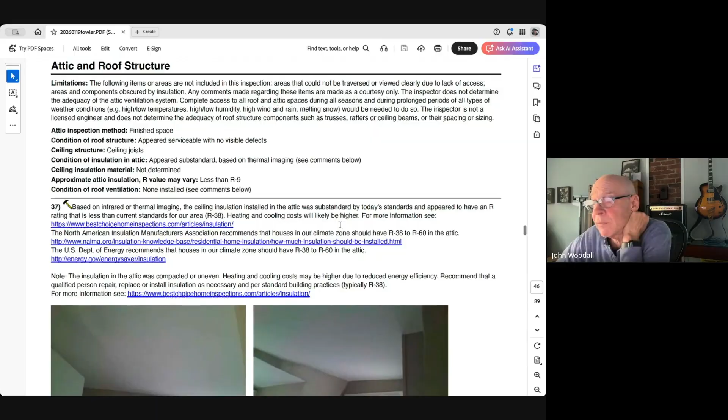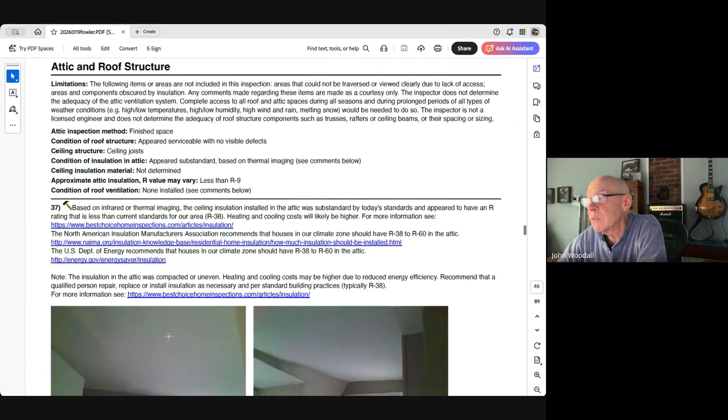If it's a finished attic like this and I can't see through the drywall, I'll hit it with infrared and look for dark spots, which indicate a cold spot. That could mean there's a bare spot of insulation, or it could mean water. As you learn to read infrared signatures, you can spot water - it looks like somebody spilled a drink. It's fairly obvious. Maybe I've got a shot in here.

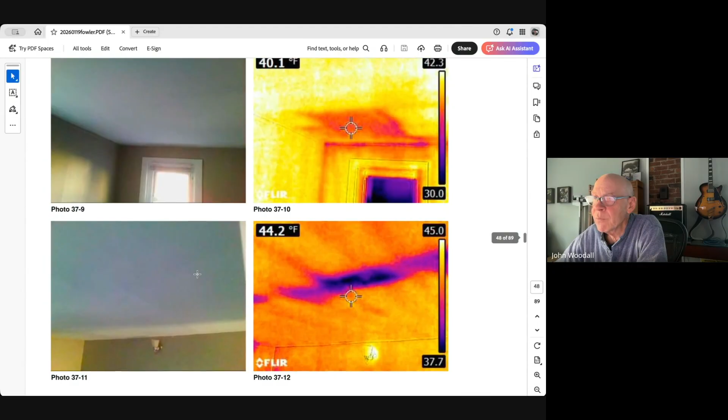So here we're looking at insulation - you can tell because the squares are even, and you can see the joists, so we know they could have insulated better there. Water spots look a little different, like a purple spot, like a spilled drink. I don't see any of that here - I think this was more about needing better insulation.

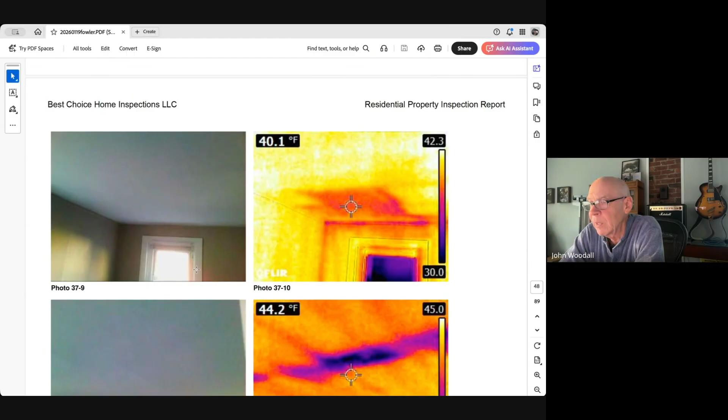At the time of this report, I remember that furnace just couldn't keep up. I think it was a mix of poor insulation, some poor windows, and the furnace itself had a problem. I think we sorted that out - you were saying they fixed it, they took care of it.

This is something I throw in at the end of my report because a lot of my clients are first-time home buyers, and I like to talk about the difference between a big deal and a little deal and what really matters. Real estate agents like to talk about this too, because you don't want to kill a deal on a house you may really love because you don't like the carpet. Let's keep things in perspective. So this outlines what's a big deal and what's a little deal, and I include that in every report. I think it's a good idea to either have the conversation or include it.

So that's a typical report - well actually, this is not a typical report, this is an old house. This was probably a good one to look at because it had unique issues. Modern homes aren't going to have stone foundations and things like this. But it was a beautiful old home, and it had its issues.

Why don't we - do you have any questions about this report specifically, or this home, or anything in general regarding that?

We did a sewer scope inspection on this one, as I was saying before - why don't we take a look at that? Let me see if I can. Brandy, how did it turn out, how'd the negotiations go with this inspection? Yeah, this one we just had them fix the furnace, honestly, because they weren't really concerned with a lot of this stuff, and we had already offered less than asking.

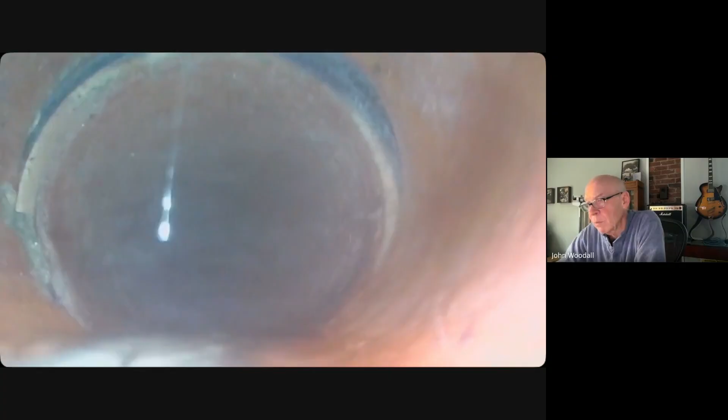We see a seam here. I guess you guys can see my mouth. There's a seam. I always run the water when I'm doing these so I can see how it's moving down the pipe. These are fun to watch. If you ever go to a home inspection, try to be there and watch this, because you'll see what the inspector sees. Okay, so look here, we've got an offset where the seams are coming apart.

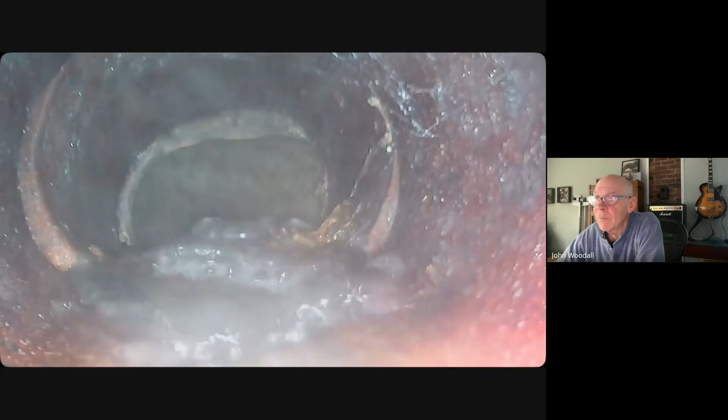Now this isn't really bad, I've seen much worse, but this is where roots will find themselves in. So we keep going down the line, and we're starting to see some debris and some roots find their way in. We'll let this keep playing.

We're going to get to a root section here that I think is worth seeing. Let me see if I can move it up a little bit. Yeah, right here, I think that's the same segment.

Yeah, that's the worst part. Oh yeah, here's the one. Oh dear. Here's the one that concerned me more. Right there - that was a little bit more egregious roots. Pulling back, you can see a little bit more.

Now, my perspective on this is this house was over 100 years old. This pipe is probably not worth digging up and replacing because we didn't find cracks, broken pipe, or really bad roots that would create a clog. This is kind of a normal 100-year-old pipe. So as bad as it looks, it's not horrible.

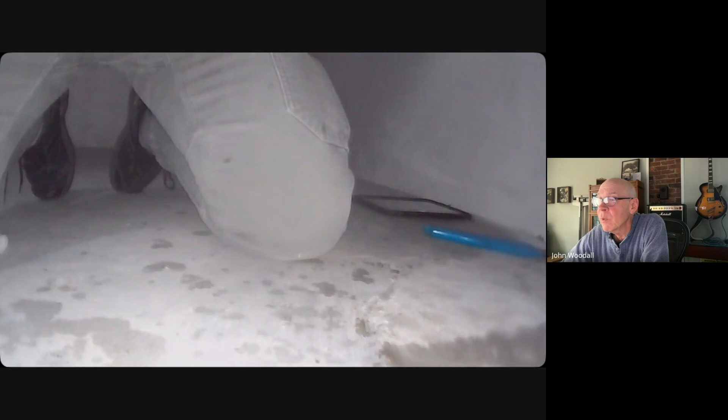There are options that, as we go through the home inspection process, if we were having this conversation, I'd recommend a licensed plumber who does this kind of work look at it and give you an estimate if you feel it's necessary. I don't feel this one is necessary, but there are options, like lining the pipe - much cheaper. They basically put a fire hose down there impregnated with epoxy and then blow it up. It hugs the wall of the pipe, and now you've got a clean lined pipe. That saves you from digging up the yard and killing that 100-year-old maple tree out front. But digging up the yard is the other option, very expensive. Let me get rid of this screen.

I have a question, John. When I bought my house, they said you should use RootX every 3 months just for maintenance. Is that a good idea?

Yeah, and that's what I did to a house that I had previously, and I actually learned that from the plumber. I'm sorry, bear with me a second, I'm trying to bring the call back.

Okay, here we are. So what you can do - and rock salt's another good one, by the way, less chemicals, and it will kill the roots. I used to pour rock salt down mine every few months, or if I noticed it was starting to get slow, because we didn't want to spend the money on digging up the pipe, and we knew what was going on and how bad it was or wasn't. But I've gone both ways on that. These are conversations you want to have with your home inspector and maybe ultimately the plumber who wants to do that or needs to do that.